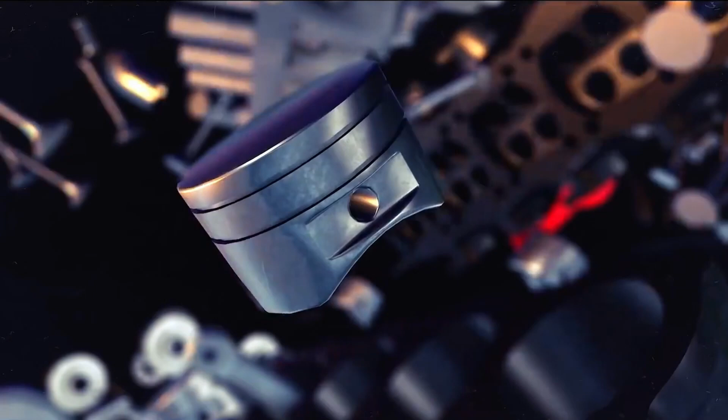Hello everyone. In the last session, we studied the inspection following the disassembly of a single-cylinder diesel engine, gaining a thorough understanding of its structure. Now let's delve into how to properly reinstall the single-cylinder diesel engine. This course builds on understanding the structure of the engine, focusing on assembly and disassembly to deepen your comprehension of the engine's design.

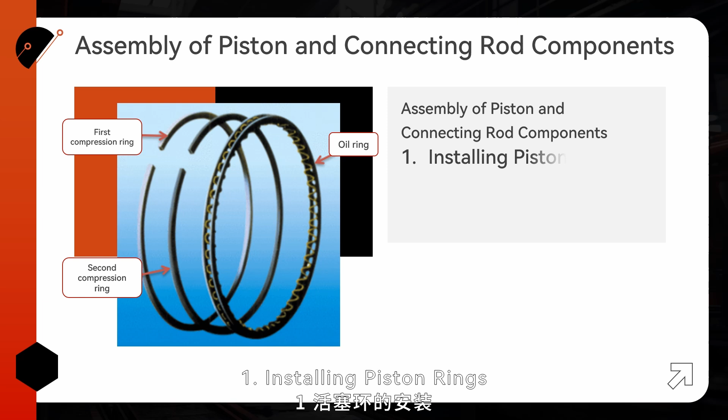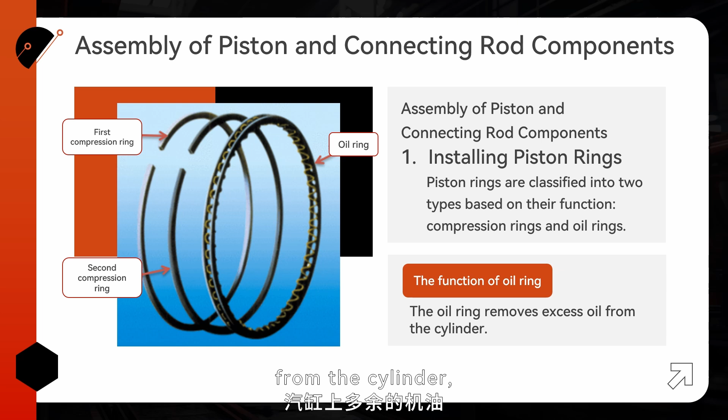One, assembly of piston and connecting rod components. First, installing piston rings. Piston rings come in two types: oil rings and compression rings. The oil ring removes excess oil from the cylinder, while the compression rings seal the combustion chamber. Piston rings are metal rings with substantial outward expansion and are inserted into grooves on the piston.

Install the piston rings in the following order using a ring expander: 1. Oil ring. 2. Second compression ring. 3. First compression ring.

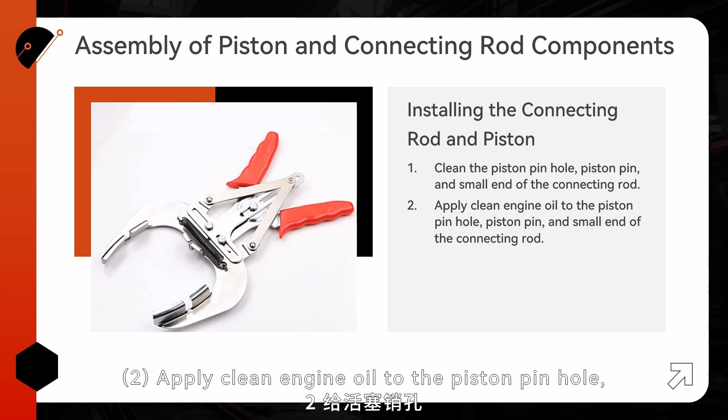Two, installing the connecting rod and piston. 1. Clean the piston pin hole, piston pin, and small end of the connecting rod. 2. Apply clean engine oil to the piston pin hole, piston pin, and small end of the connecting rod. 3. Attach the small end of the connecting rod to the piston using the piston pin and secure it with the pin lock ring.

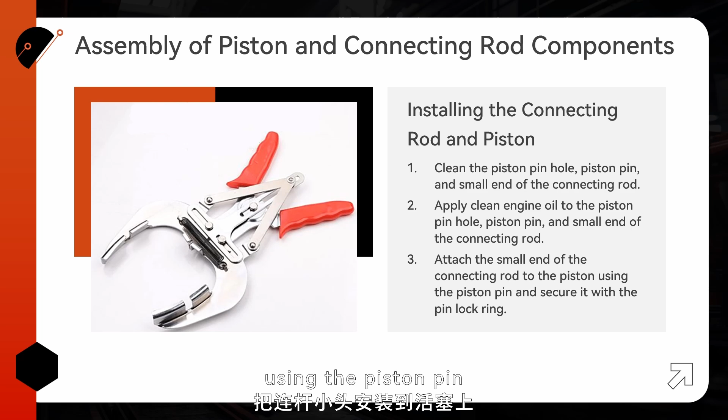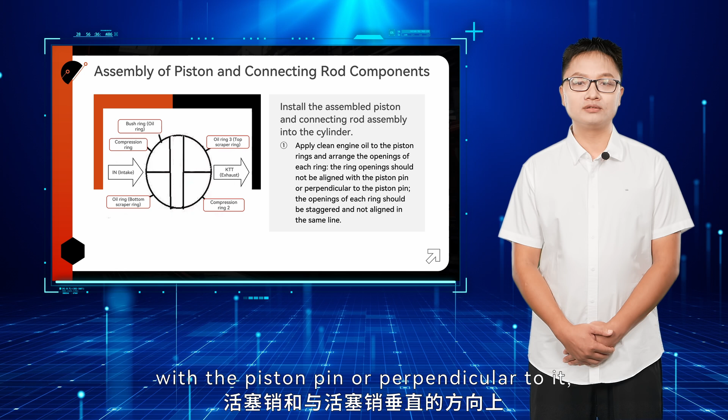Three, installing the assembled piston and connecting rod into the cylinder. 1. Lubricate the piston rings with clean engine oil and arrange the ring gaps. Ensure the gaps are not aligned with the piston pin or perpendicular to it, and stagger the gaps so they are not on the same line.

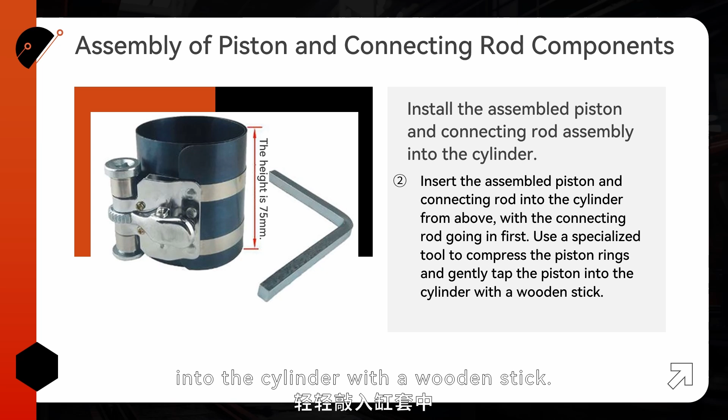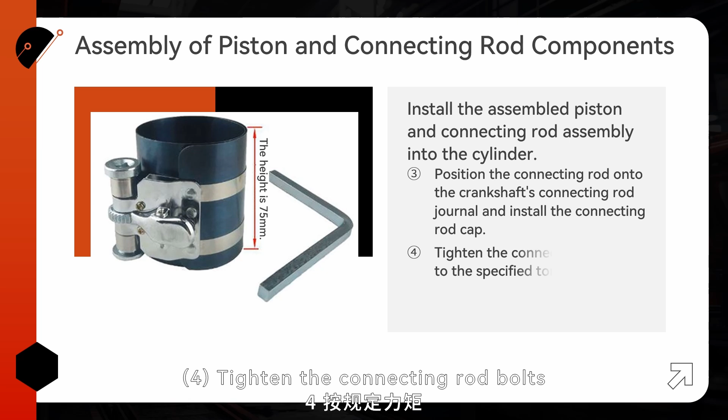2. Insert the assembled piston and connecting rod into the cylinder from above, with the connecting rod going in first. Use a specialized tool to compress the piston rings and gently tap the piston into the cylinder with a wooden stick. 3. Position the connecting rod onto the crankshaft's connecting rod journal and install the connecting rod cap. 4. Tighten the connecting rod bolts to the specified torque. 5. Slowly rotate the crankshaft to ensure it turns smoothly.

Two, assembly of the valve components and cylinder head installation. First, assembling the valve components. 1. Apply clean engine oil to the valve stems and insert the valves into the valve guides. 2. Install the valve springs and lubricate them. 3. Attach the spring seats. 4. Use specialized tools to install the valve locks.

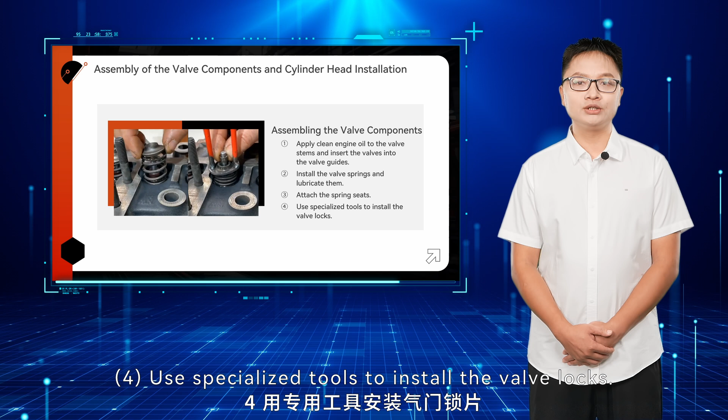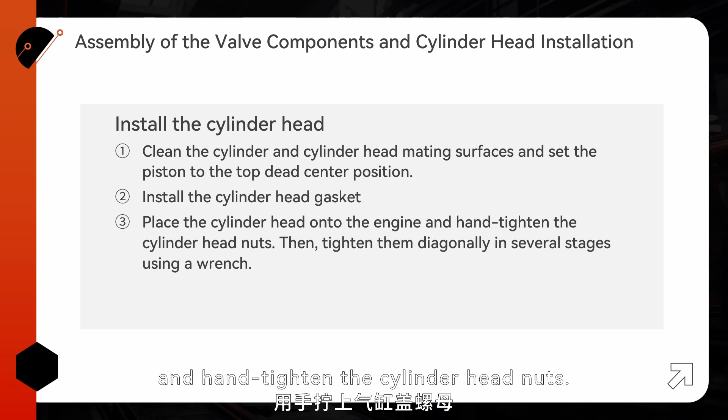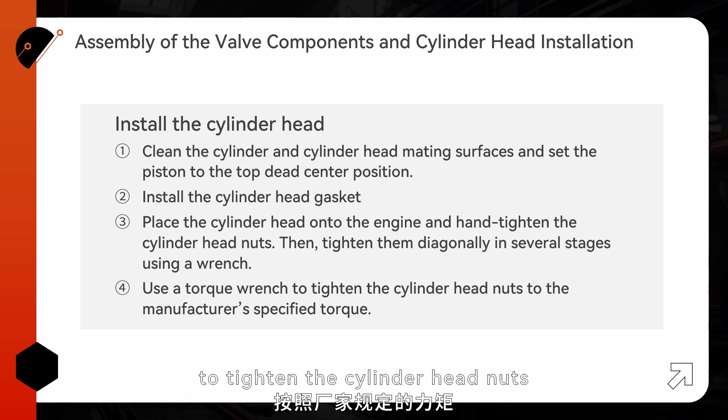Second, installing the cylinder head. 1. Clean the cylinder and cylinder head mating surfaces and set the piston to the top dead center position. 2. Install the cylinder head gasket, ensuring the alignment marks are properly positioned. 3. Place the cylinder head onto the engine and hand tighten the cylinder head nuts, then tighten them diagonally in several stages using a wrench. 4. Use a torque wrench to tighten the cylinder head nuts to the manufacturer's specified torque.

Third, installing the rocker arm. 1. Install the valve tappets. 2. Install the rocker arm assembly. 3. Adjust the intake and exhaust valve clearances to the manufacturer's specifications.

Three, installation of other components and valve clearance adjustment. First, installing the high-pressure fuel pump and governor. 1. Clean and install the high-pressure fuel pump. 2. Install the diesel engine governor mechanism. 3. Attach the gear cover. 4. Install the high-pressure fuel lines and injectors.

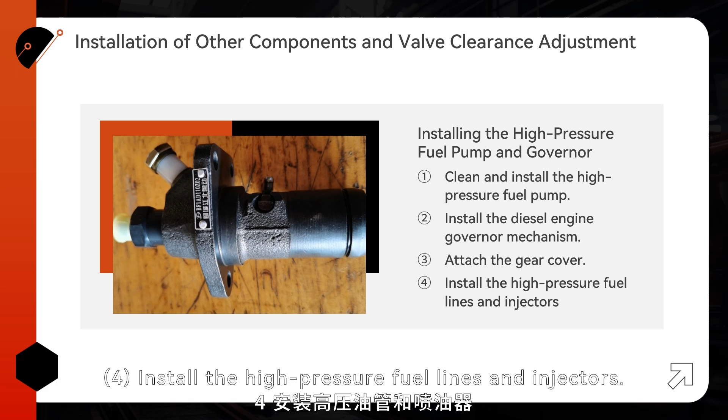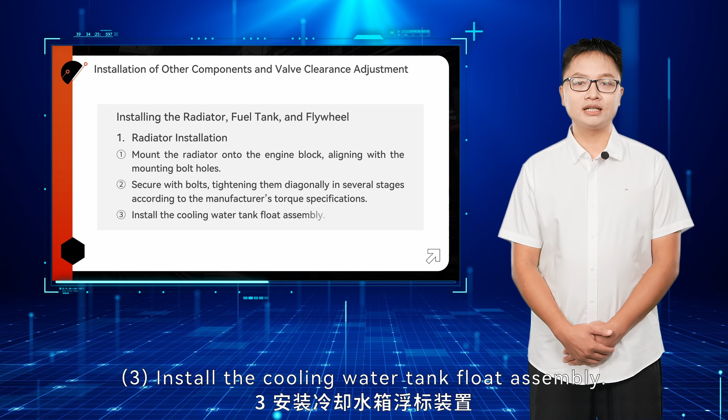Second, installing the radiator, fuel tank, and flywheel. Radiator installation: 1. Mount the radiator onto the engine block, aligning with the mounting bolt holes. 2. Secure with bolts, tightening them diagonally in several stages according to the manufacturer's torque specifications. 3. Install the cooling water tank float assembly.

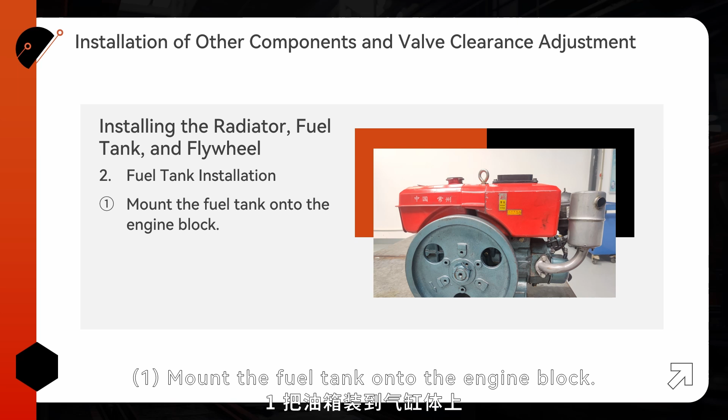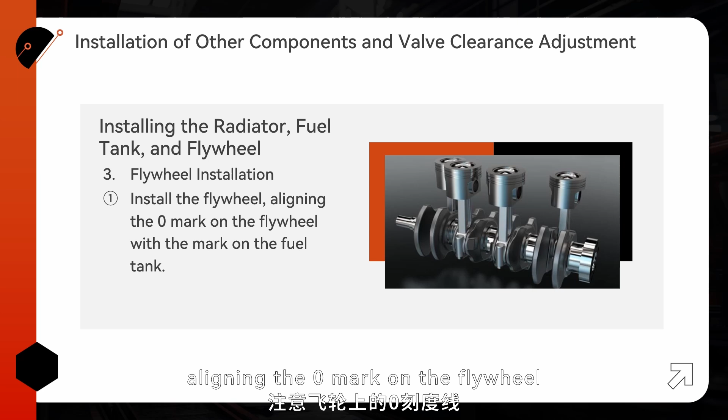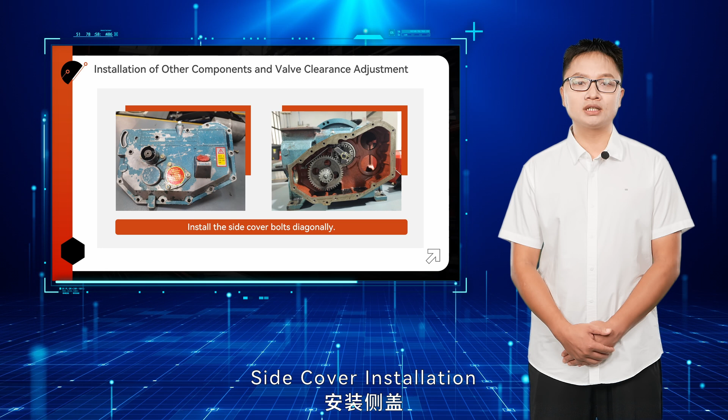Fuel tank installation: 1. Mount the fuel tank onto the engine block. 2. Tighten the fuel tank mounting bolts. 3. Attach the diesel engine lifting hook. Flywheel installation: 1. Install the flywheel, aligning the zero mark on the flywheel with the mark on the fuel tank. 2. Tighten the flywheel nuts with specialized tools. Side cover installation: install the side cover bolts diagonally.

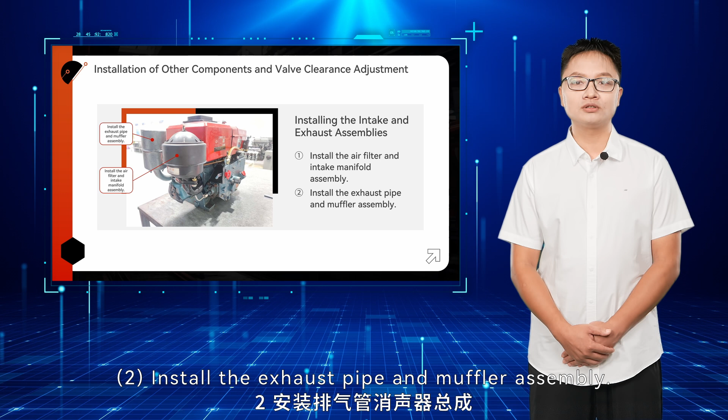Third, installing the intake and exhaust assemblies. 1. Install the air filter and intake manifold assembly. 2. Install the exhaust pipe and muffler assembly. Fourth, installing the drain plug.

Five, checking and adjusting valve clearance. 1. Rotate the flywheel to align the zero mark with the mark on the fuel tank. 2. Manually operate the rocker arm to check if there is clearance between the rocker arms and the valves. If one has clearance and the other doesn't, continue turning the crankshaft for one full circle to make sure both the inlet and exhaust valves have clearance with the rocker arm.

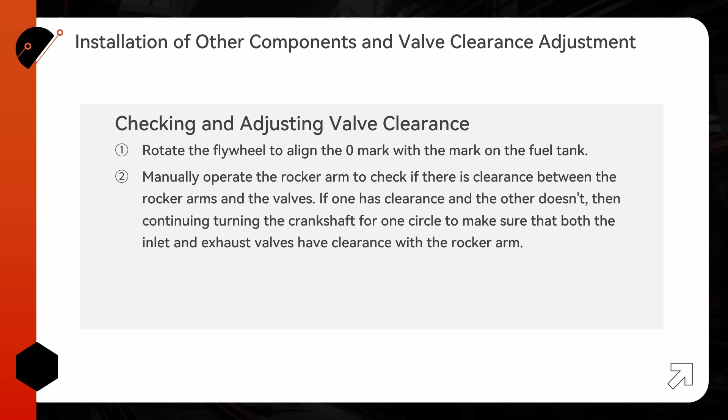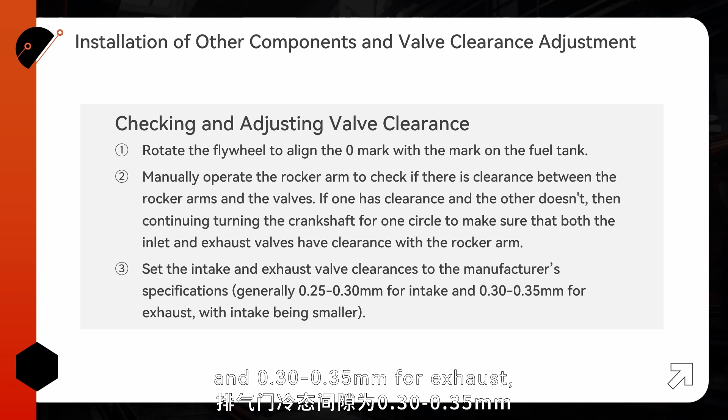3. Set the intake and exhaust valve clearances to the manufacturer's specifications, generally 0.25 to 0.30 mm for intake and 0.30 to 0.35 mm for exhaust, with intake being smaller.

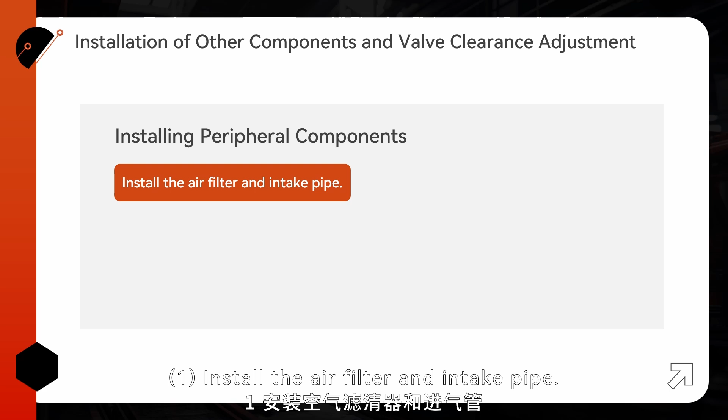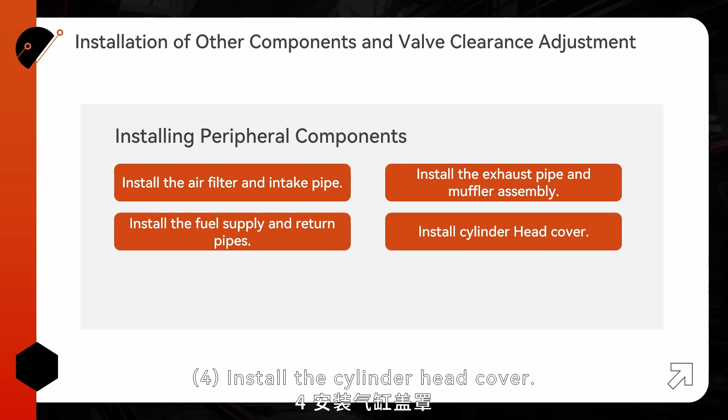Installing peripheral components: 1. Install the air filter and intake pipe. 2. Install the exhaust pipe and muffler. 3. Install the fuel supply and return pipes. 4. Install the cylinder head cover. 5. Install the oil pan.

Seven, filling fluids: 1. Add coolant. 2. Add diesel fuel. 3. Add engine oil. Eight, rotating the crankshaft to start the engine.